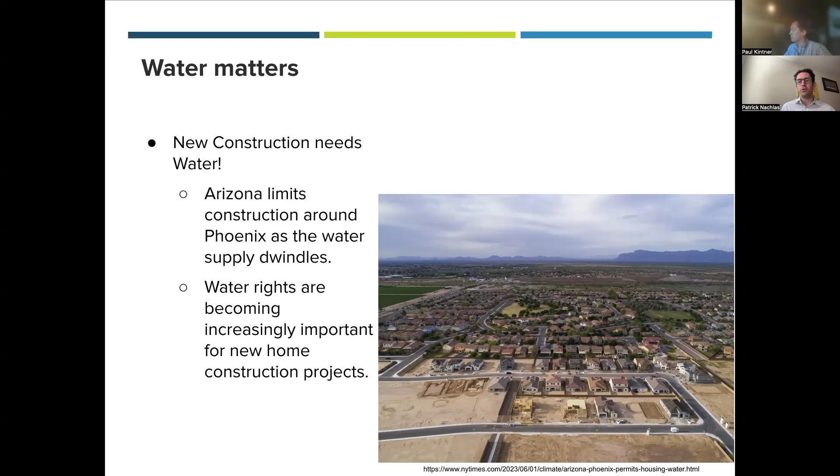This is a graph showing the population with the water production in Phoenix specifically. As you can see, since 1990, there've been almost 650,000 people added to the city in the last 30 years. But water production - meaning production of usable water in homes - has not really increased, and I think that's an important place to note. We're used to this world of energy efficiency where you can build more energy production - wind turbines, power plants, all sorts of things. It's much more difficult and costly to increase your water production. You get into things like desalination that are really, really expensive, both to develop and to implement in general. So how are we going to make up this gap, where we have a certain amount of water, but the population is continuing to rise in these low water areas?

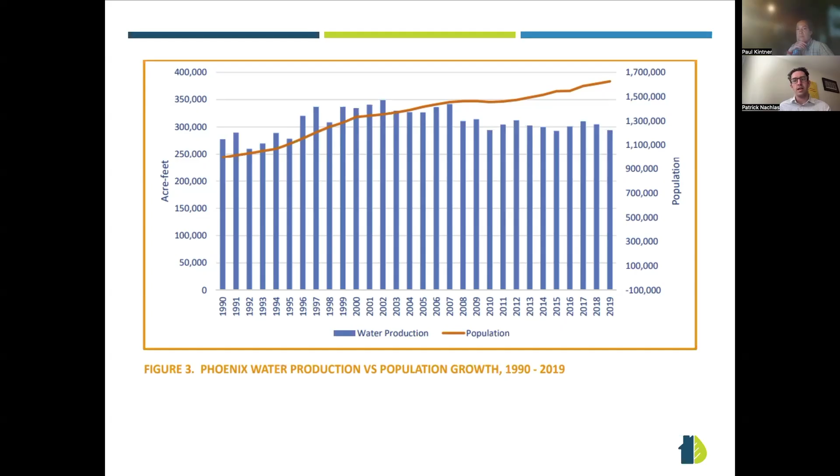That's where residential water efficiency comes into focus as an important piece of this puzzle.

This map - folks are probably familiar with maps like this. The Southwest area is typically associated with being kind of the drier part of the US. It's also been under considerable drought. I was talking to someone the other day who took his kids to the Hoover Dam and the water level was way down. So obviously there's lots of drought conditions, but especially focused in the Southwest.

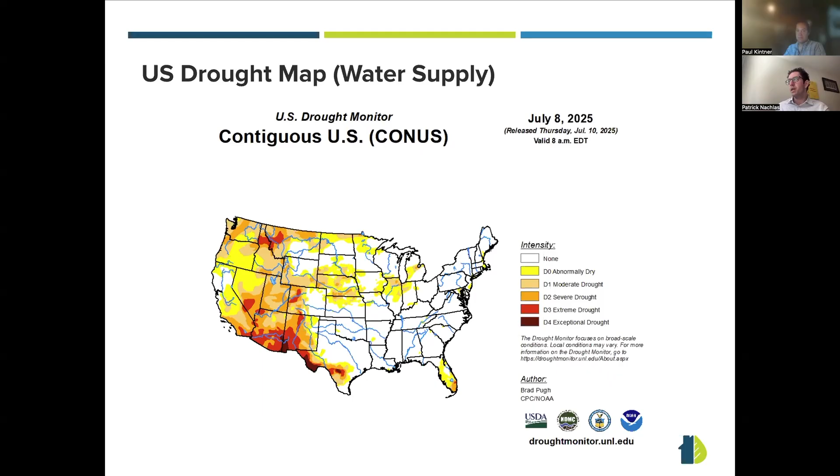This kind of reflects the water supply, but if we look at water demand and water supply, it paints a different picture where many places out west and just along the South in general are under high baseline water stress, which is if you compare the demand for usable water in homes with the amount of available usable water, you quickly get a high amount of baseline water stress.

Over half the states in the US are under medium high, high, or extremely high baseline water stress. And 41 of the top 50 home building cities in the US are in one of these medium high to extremely high baseline water stress categories. So this isn't just a problem for the Southwest. It can touch places like Florida, Texas, North Carolina, Idaho, all sorts of places.

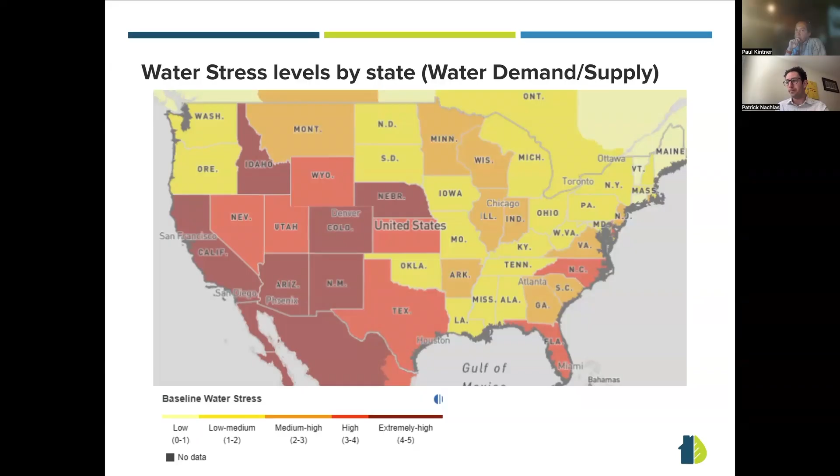That can play in this water efficiency space and have good reason to do it. This is a graph specific to the city of Los Angeles and a study they did on the cost of water production. As you can see, the price of housing, food, gasoline all follow a pretty similar trajectory that's in line with inflation or CPI. But in this specific example for Los Angeles, the cost of water has far outpaced that. And, talking to people in my life, water bills have continued to increase in many locations.

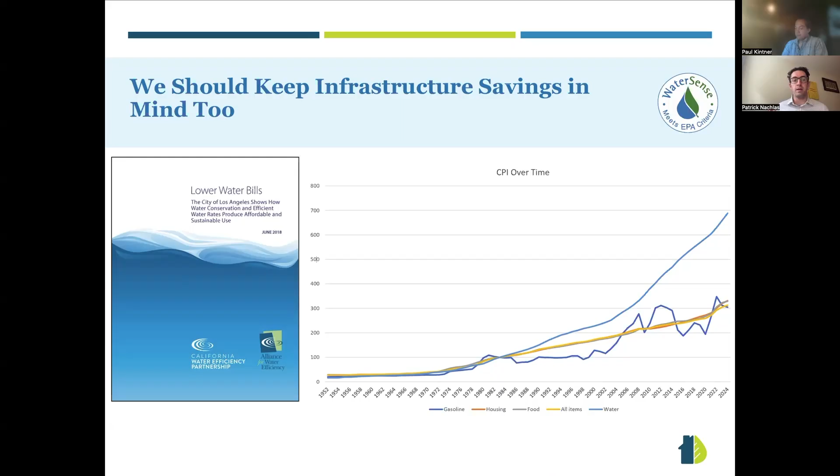So there's obviously a financial impact here as well. We talk about energy efficiency, saving people money on their energy bills. Water is a big piece of that and is continuing to be a more and more important piece of that. So that's just kind of setting the stage of why are we talking about water efficiency? Why is there a HERS H2O standard? Why is this important? It's going to continue to be an important topic for new home construction in the US.

Yeah, I saw a hand raised.

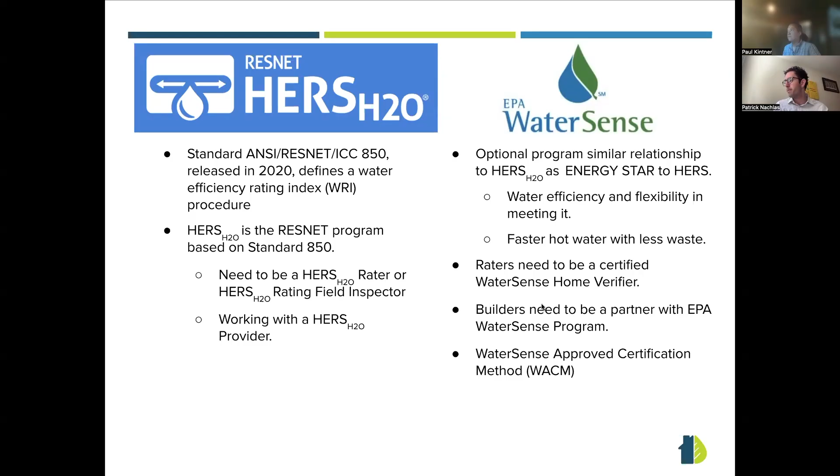Great point, Patrick. Thank you. So overall, big picture, what goes into these ratings?

First off, big things: geography, where the house is. That affects how much water it gets, how much sunlight it gets, which can all affect outdoor irrigation. And then we're looking at house size and bedrooms, which can affect things, bedrooms being a proxy for number of people. That's how many times the toilet gets flushed, how many showers are taken, things like that.

Inside the home, we're thinking about fixtures, toilets, the hot water distribution system, because this can affect hot water waste and water pressure. If there's a water softener, that's going to affect water use, and appliances, which Patrick just mentioned. Outside the home, we're looking at things like lot size, the irrigation system, how much of the lot is irrigated, and if there's a pool.

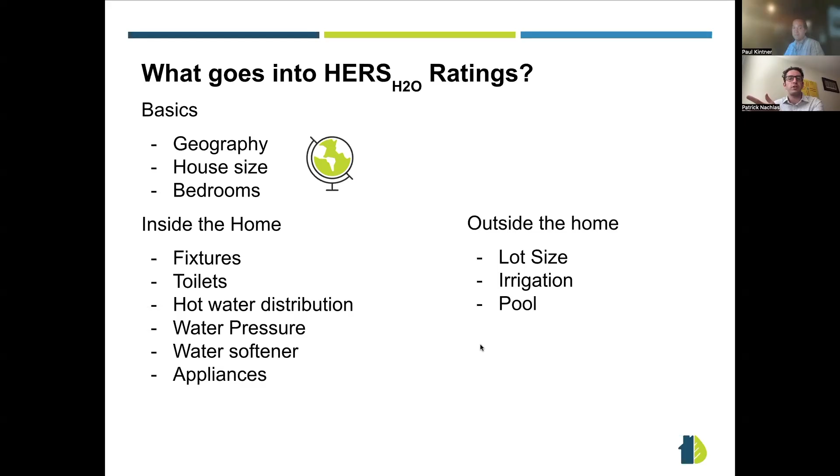You can think of this as almost like the minimum rated features for HERS H2O, if you think about it that way. That's a good point, Patrick.

So the HERS H2O rating, just like the regular HERS rating, is an index that goes from 0 to 100. For the H2O rating it's a little bit easier: we're just doing the division of the rated home water use divided by the reference home water use. There's no IAD home or any other complications, which means we can also break it out into an indoor and outdoor water rating index, if you're curious.

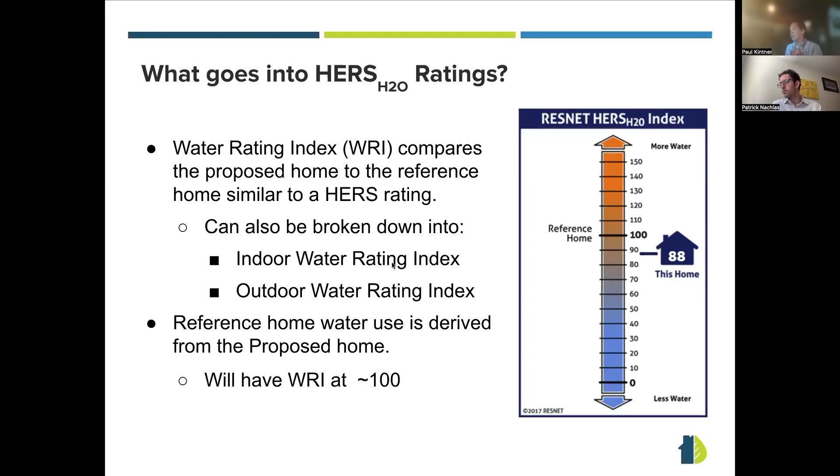The reference home, just like the HERS reference home, should have a water rating index around 100. That reference home is really largely going to depend on the lot size, the number of bedrooms, if there's a pool or not, and of course the location of the home. And those all carry over from the rated home.

So WaterSense, how does WaterSense relate back to this? We're looking for a HERS H2O or water rating index of 70 or less. That's just like an ERI target you might see with your Energy Star home, but it's going to be constant, 70 or less.

Then there are also a few mandatory extra requirements, extra inspection points that you'll make as a rater. You have to do a pressure loss test just to show there's no leakage. You have to verify leak-free connections, pretty easy, we just have checkboxes to go through and check that these things are done. And then you also have to verify for the fixtures that they have that WaterSense label on them and are WaterSense verified.

One more detail I'll add: WaterSense is run by the EPA. There's a lot happening with the Energy Star program, but the WaterSense program is legally set up a little differently. There's a specific law in place that says there will be a WaterSense program and here are the requirements. So it's a much more legally robust and resilient program than Energy Star is. While there's a lot up in the air about Energy Star, that's less the case for WaterSense. Obviously things can change, we don't know, but just wanted to share that context.

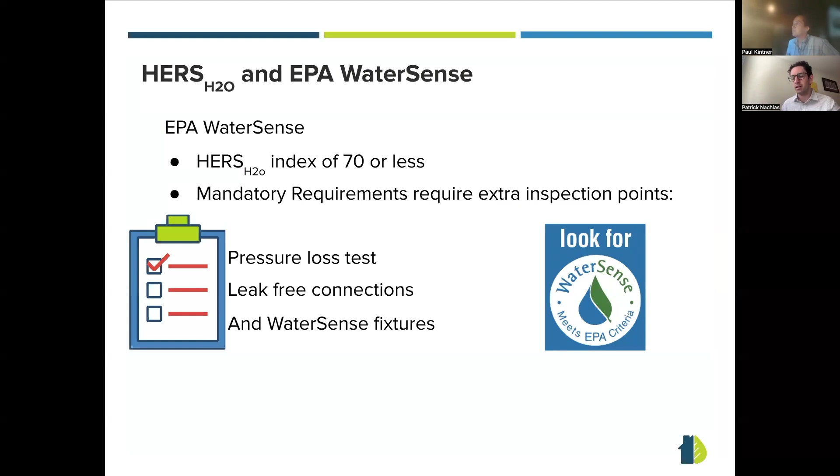Yeah, thanks Patrick. So, getting into some more detail about how this works in Ekotrope specifically.

Getting going, if you're a rater, you're probably familiar with the water tab. This is where you're logically going to start adding your water use inputs, and we have that nice checkbox on the right. Then under your codes and programs tab, you're looking for your water codes, HERS H2O, EPA WaterSense programs. Once you click that, next slide please.

This is going to signal your intent to do the HERS H2O rating. This is going to add the water rating index to your quick results and enable the analyses. Without this clicked, we can't really do anything for you because we won't have the inputs.

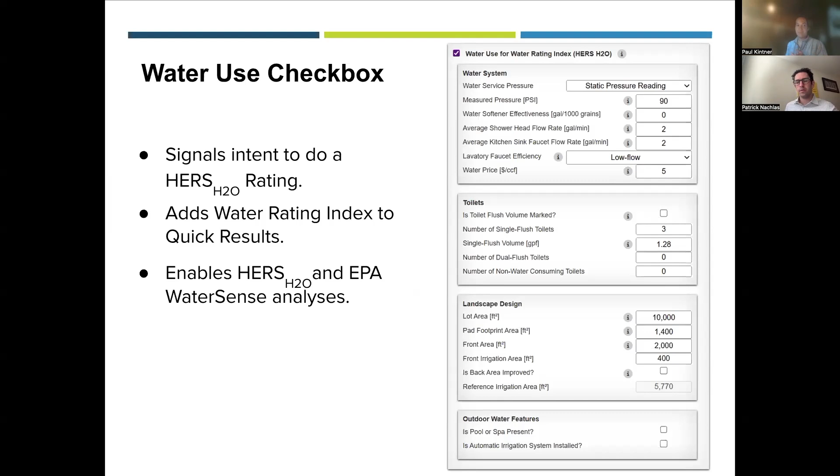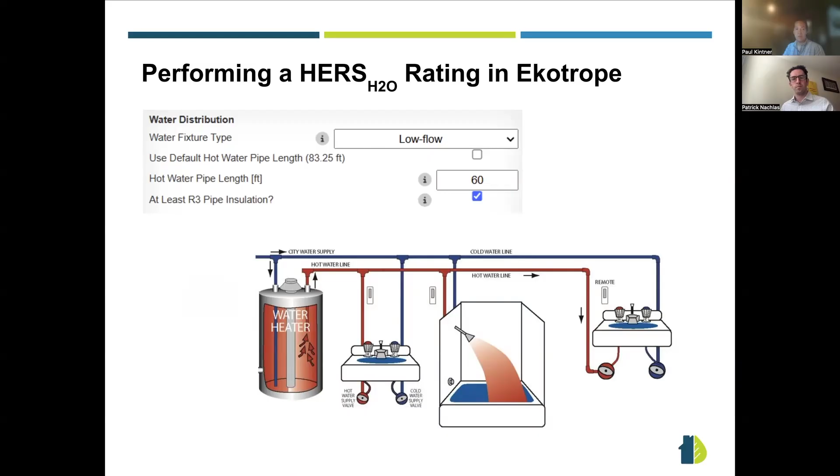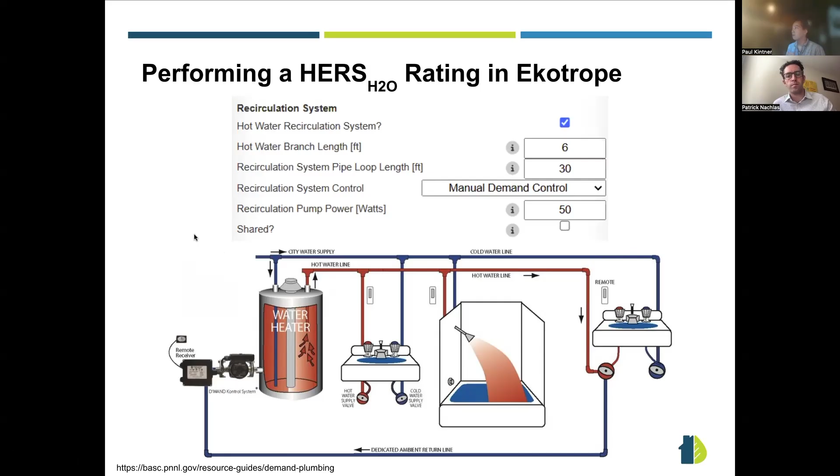Then there's also the recirculation system. If you have a recirc system in your residential home, it's great - it can help reduce hot water waste. You're looking at things like the branch length, the total length - the farthest distance from the recirc loop to the farthest fixture - and the recirc pipe length, which is the total length of the return and supply side, the control system, which for residential use I hope is probably some sort of demand control, and then the recirc pump power. The last one doesn't really affect the water rating index, but these other ones will greatly affect the water waste as well.

Next is drain water heat recovery. It's not incredibly common, but sometimes you can capture that waste heat from a faucet or the shower. As you take a 15-minute shower, all that heat is just going down the drain, getting wasted. Drain water heat recovery would have some sort of heat exchanger at the drain and capture that and bring it back to either the hot water tank or the cold side for that faucet. So you can capture some of the heat and bring it back and reduce hot water usage.

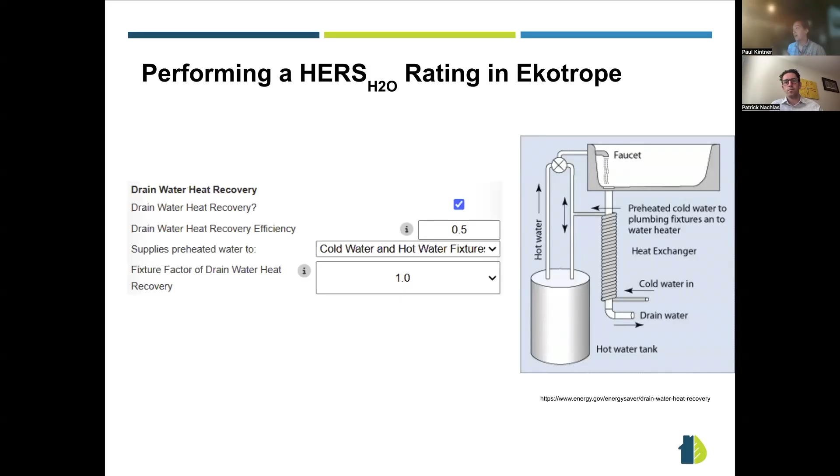You can also do a couple other methods here, like if there's an installed pressure tank or pressure reducing valve, you can use those as verification, or written documentation from the actual water supplier that the service pressure is less than 90 psi. So we're looking here, you want it to be less than or equal to 90 psi. If it's greater, there'll be assumptions that the rated home, and not the reference home, is using more water at the fixtures just because the pressure is higher.

Then there's water softener effectiveness in gallons of H2O per 1,000 grains removed. This should be available from any product literature you can see. And if there is no water softener present, just leave it at 0 - it'll be excluded from the rated and reference home models.

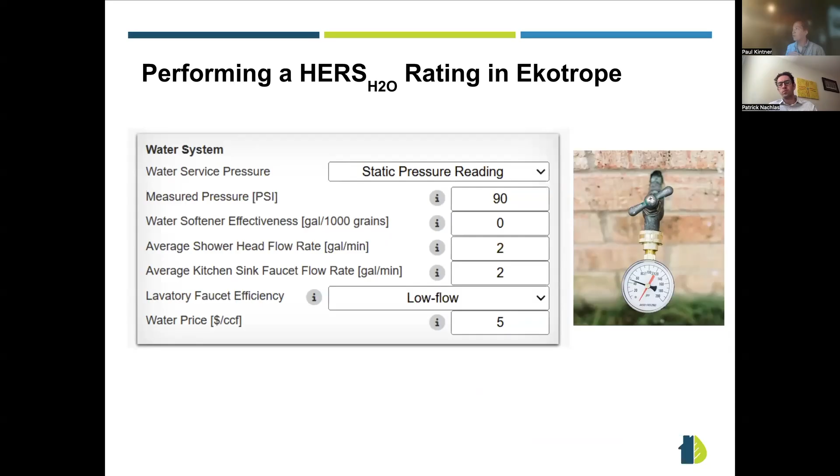Next slide, and then toilets. Is the toilet flush volume marked? A lot of toilets, I think all toilets, will have a stamp declaring how much the flush volume is. I didn't have a picture of it, but it should be pretty easy to find on the outside or inside of the tank.

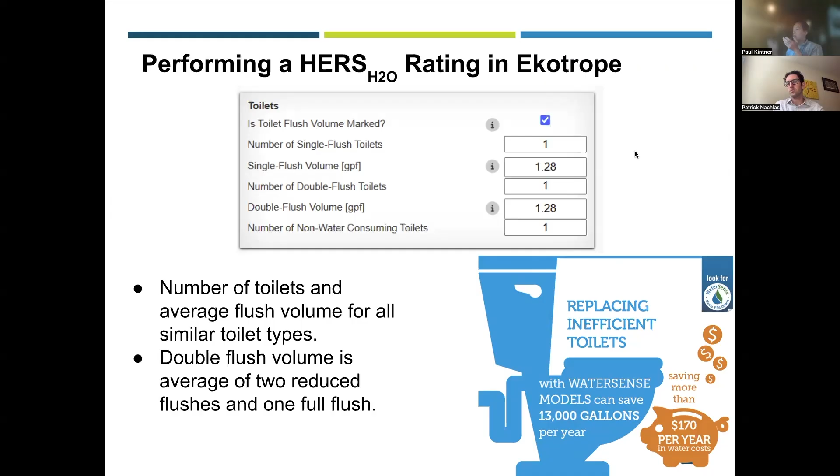And then we need to know the total count of single flush toilets, double flush toilets, and non-consuming water toilets - toilets that don't actually consume water - and their average flow rate for each. For double flush toilets, you're looking at the average flow rate of 2 reduced flushes and 1 full flush - I guess someone had to think about that. And then we'll average all the toilets together for you.

So next slide, landscaping - now we're outside the home. Here we need to know the total lot size, so in this image, the total rectangular area of this lot. And then we'll have the pad footprint area, which is the area of the house, the garage, the hardscape stuff that can't be irrigated. And subtracting those from each other, we have the total available irrigation area.

We also need to split this between the front area and the back area. This is pretty subjective - I don't think anyone's going to say you're wrong when you do it, but just come up with some sort of dividing line here, where's the front and what's the back of the home. This is a corner lot, so it's pretty subjective - I think this is one where you can just do your best.

If there's no irrigation, you can put 0 irrigation as well. We need front irrigation area and back irrigation area. I'm aware that sometimes lots aren't finished, so if the back of the lot isn't finished, you don't have to click the 'back area improved' checkbox. But part of the standard requires that we estimate how much of that back area will be irrigated.

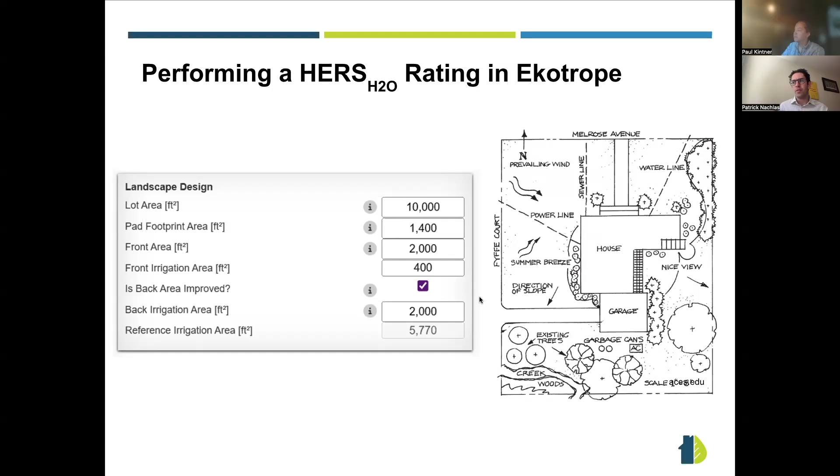So I think we're going to stay on this—oh yeah, we're staying outside here.

Lastly is just kind of these outdoor water features. Is there a pool or spa? If there's a pool or spa, that also should be present in the reference home.

And then irrigation stuff, right? Is there automatic irrigation installed? If there is, has that system been audited? Let's bring a professional out to do the auditing of the system. Is that system weather controlled? I think a lot of modern irrigation controllers have a little bit of Wi-Fi connectivity, and it's pretty easy to get one extra $100 or so, and that saves you about 15% on your outdoor water use.

So that's a pretty big credit right there. And it just prevents you from watering when it's already raining outside.

Then there's the residential irrigation capacity index—this is another big one. This is basically the total irrigation of all your zones. So I'll measure, if I have 5 zones, all 5 zones, how much the flow is from them, and then sum them all up. In this case, it's 9.6. Then divide by the total irrigation area divided by 1,000. This gives you a relatively small number—in this case, 4.

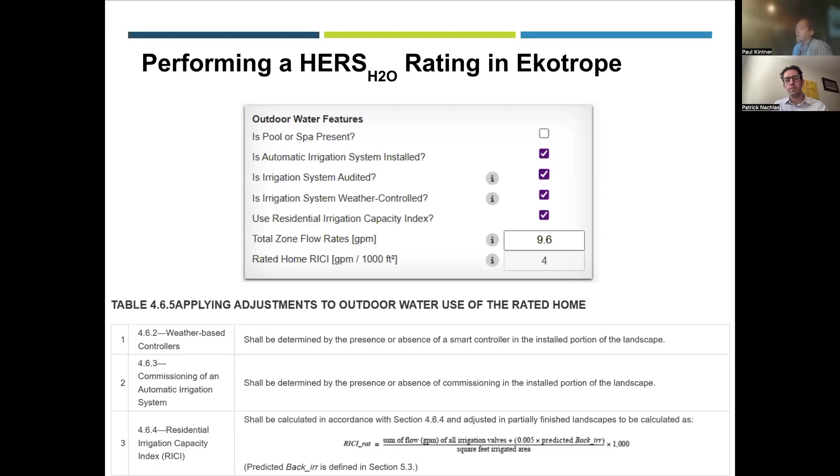Awesome, thanks. And then for WaterSense, the only additional things we ask besides all of this stuff for HERS H2O is this list of check boxes - that pressure loss test, leak free fixtures, and the WaterSense labeled toilets, sinks, and shower heads.

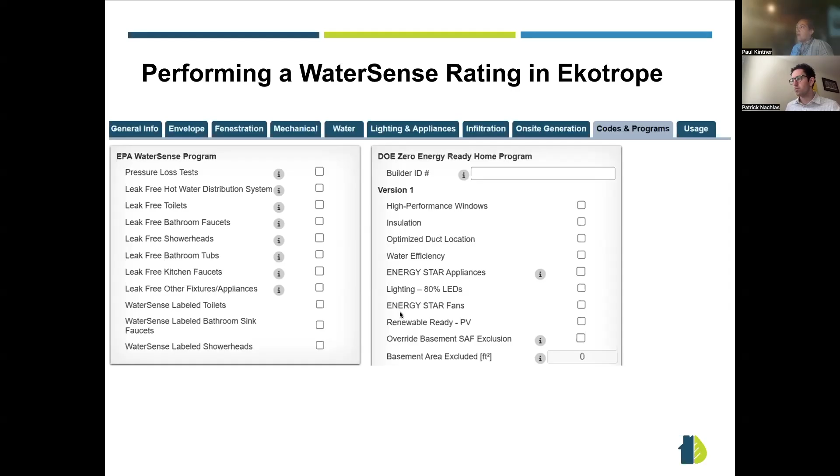And we also, of course, have all the great QA checks you're used to. For HERS H2O, we have the water rating index and all the other inspection points. And then EPA WaterSense requires proof that you've met the target, and proof that you've also complied with H2O and the WaterSense requirements. For the H2O check, we've also added the water use information.

This isn't something we typically do, but we've surfaced essentially results for the rated home water use and the reference home water use. Here you can see indoor and outdoor comparisons. In this case, I can see the reference home is using almost 3 times as much outdoor water use as indoor water use. So I know the reference home's outdoor water use is going to be a really big piece of the pie there. So anything I can do to reduce irrigation will make a larger impact than putting in shower heads that are now 1.8 instead of 2 GPM.

Gotcha. I got a couple things, but one thing I want to add - on average, about 30% of residential water use is used outside of the home, meaning the outdoor area. That's considerable, and especially in warmer climates it can often be even higher, closer to 50%. I just wanted to put that out there - it really makes sense that if you're going to do a water rating, you really do need that outdoor area calculated. It's not really enough to just focus inside.

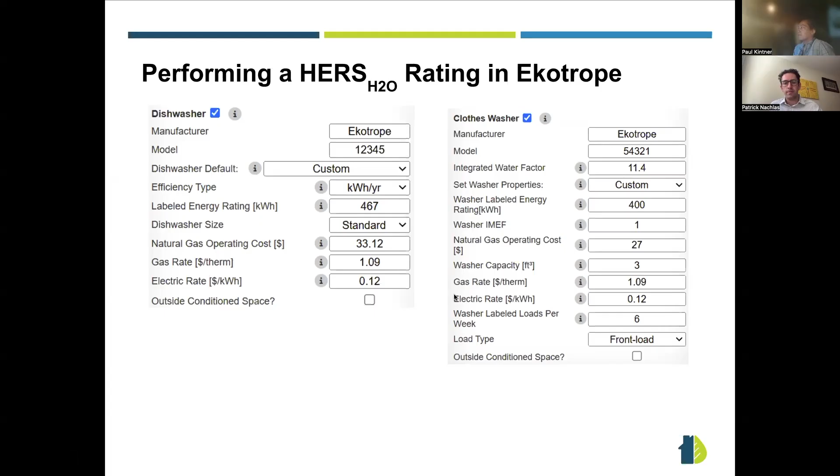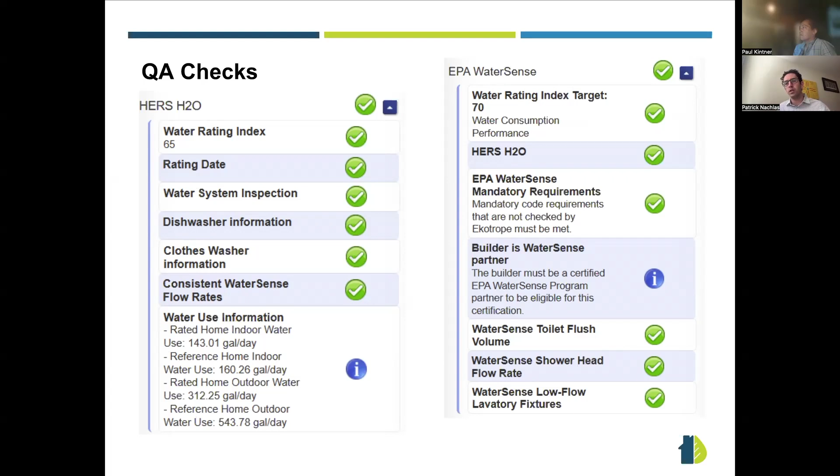So we talked a little bit about these QA checks. I'll just say, a lot of times we don't surface this reference home information like we do here, but because this is such a new area and there's so much learning that still needs to be done, we wanted to make sure it was visible and easily accessible for raters.

Beyond the HERS rating, there's just a few extra things: we're looking at fixtures, figuring out what the flow rates are, doing pressure loss testing, doing that leak inspection, and doing lot sizes and irrigation areas. Not much more equipment needed - probably already have a measuring tape, and probably just need to get something to test pressure.

And then there's also irrigation inspections. As we mentioned before, this is optional. Doing that, though, can provide quite a big benefit. We'd also be interested in hearing from y'all if you've been doing these - what was the hardest part, what takes the longest time with the inspections?

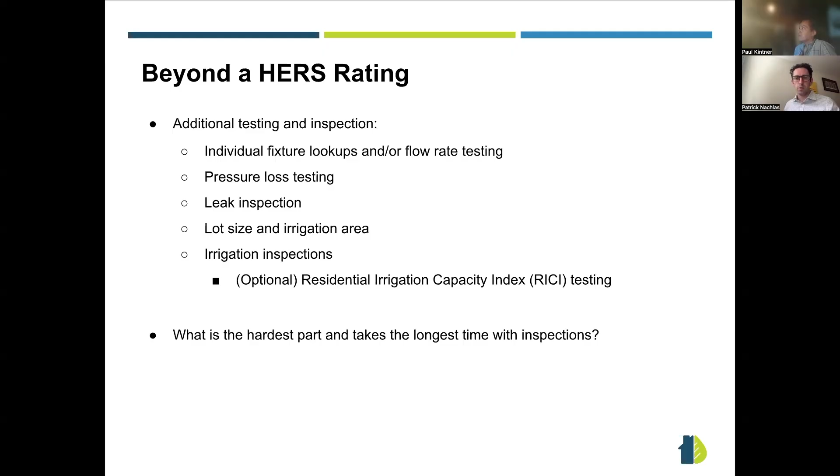What we're setting up here with HERS H2O is basically a parallel RESNET registry submission workflow to HERS Energy. They can happen at the same time, but they can also happen at different times. We'll talk about that in a second. Obviously it's a RESNET submission, so you'll need a rater of record, and we have a user role called the water rating field inspector - this is sort of like RFI, but for water.

Just like HERS Energy, we have automatic QA checks when you go to submit with RESNET. This is kind of typical workflow. One thing I'll say about generating reports: we have the HERS H2O certificate, we have the WaterSense labels and certificate. There's a few other reports that we plan to add, but we'd love to hear from folks about what reports would be most helpful. The more requests we get, the quicker we can implement adding these things.

So please let us know. And this is an important point: if you're submitting your HERS H2O registration at a different time than your HERS Energy submission - let's say you do the final inspection, but the exterior isn't done for another week - when you go to submit that final water inspection, you may want to also re-register for HERS Energy.

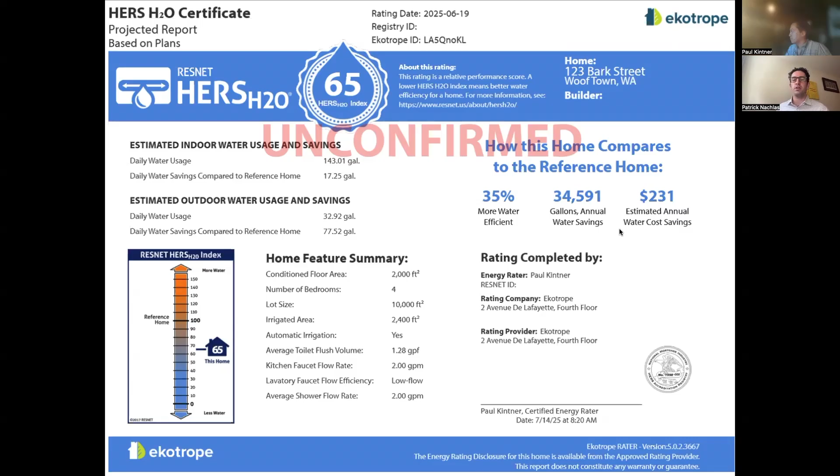So why perform HERS ratings in Ekotrope, and also just in general? Let's talk about it. Currently, HERS H2O is supported via a spreadsheet. By bringing this into our software, you can now complete HERS H2O ratings all in one place. You no longer have to manage two separate tools, and it just allows it all to be in one place. You don't have to worry about version control.

Having different versions of the HERS H2O spreadsheet has caused some issues in the past. With Ekotrope, everything is on the same version. It's very easy to go back to old versions, or forward if there are newer versions released.

Also, obviously, all the reports like HERS Energy are on demand. Currently, if you submit a home for HERS H2O, you may have to wait several hours to get those reports back after you've submitted the spreadsheet. So overall, it saves time.

You also get access to Ekotrope support with all of this, whereas you may not have as active support from the folks at RESNET. They're great, it's just that we have very focused, dedicated support people who are standing by on this stuff.

We had some questions earlier about whether Ekotrope is going to charge for this. HERS H2O is currently free. It will start to cost next month, and it's a per-project charge, like most other things in Ekotrope. You can talk to your RESNET provider to determine what the cost is, but it's less than what a HERS energy rating will typically be. We're charging for it because we are taking on the support of this and trying to provide value around it.

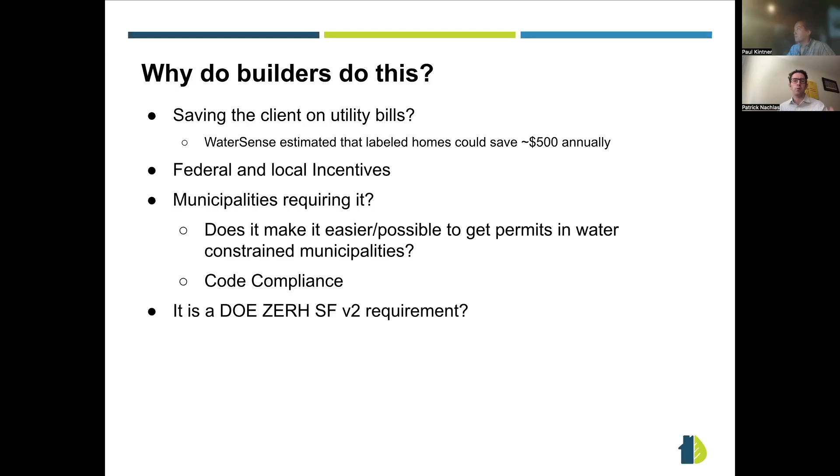That's basically bringing us near the end. So HERS H2O, big picture, it's a new frontier for HERS raters. Some HERS raters are already well aware and experienced, but in general it's new for our industry. It's a new kind of tool in the tool belt that a HERS rater can have when talking to a builder, if that's something the builder is interested in. Water efficiency, residential water efficiency - increasing production of potable water is very expensive and very difficult. So we're expecting the demand for water efficiency and water efficient homes to continue to grow. Like what we were looking up earlier, I think 3 of the 5 hottest years on record have happened since 2020. So water efficiency is going to continue to be a really important topic.